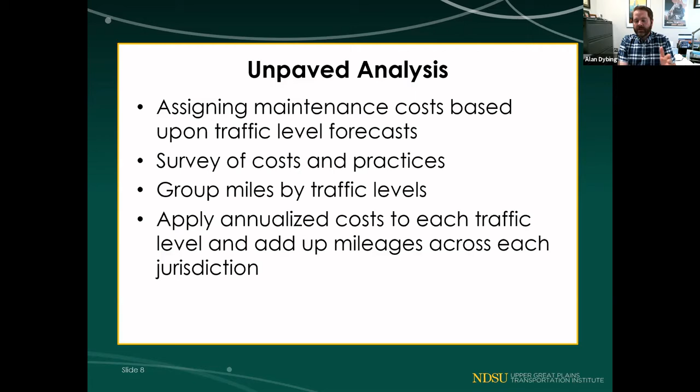In order to assign these maintenance costs, we send out a survey of costs and practices to counties and townships across the state. Then we group the miles of road in each county by traffic levels, and using their costs and practices, we apply an annualized cost to each traffic level and sum up the mileages across each jurisdiction. So for an individual county, we'll sum up the miles in each traffic category, apply an annualized cost, and then we have the total cost for that jurisdiction.

I mentioned the gravel survey. We mailed it to all 53 counties and to all the organized townships across the state. On the map on the right-hand side of the slide, the green represent the organized townships and the gray represent the unorganized townships. For the counties, we got every single survey back, so an excellent response rate. On the townships, an excellent response rate as well; 75% of the surveys came back. Again, they were based upon the costs and practices.

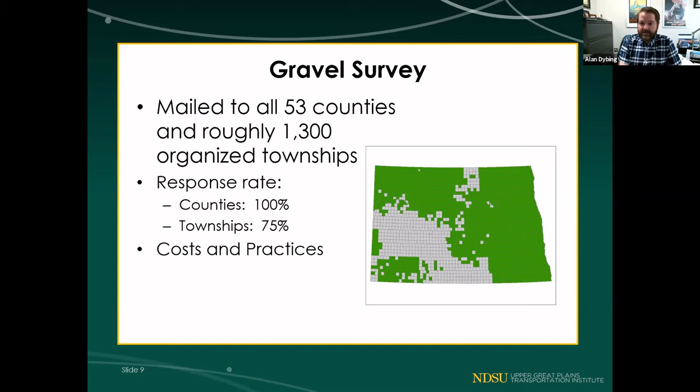One reason we apply different costs at different county levels is there's a lot of variation from county to county. One of the largest sources of variation is the availability of quality aggregate to put on the roads. This slide is the aggregate cost per cubic yard, mapped to show variations. One of the factors in how frequently they apply overlay to their gravel roads is how much the aggregate costs. We can see regional variations out in the oil patch: McKenzie, Williams, Divide are higher costs. Traill County on the eastern side is an outlier. Their reported bids for gravel include the cost per yard plus the trucking costs, so that is high.

One of the questions we always have when we have the results of the study is to look at variations from county to county and region to region. We may have one county out west with similar mileage to a county out east, and the cost may be much higher due to traffic, but also due to cost component reasons. So this is the cost per yard.

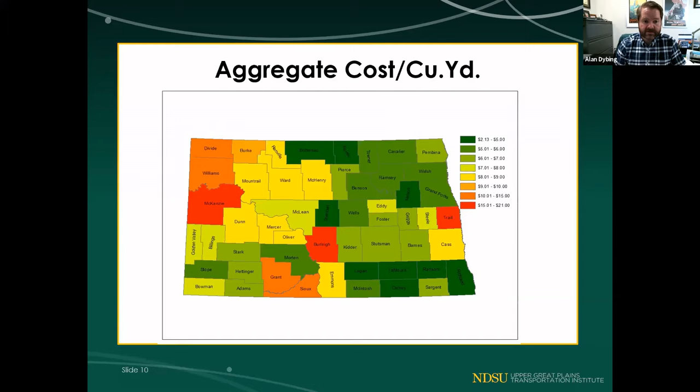Then the last set of questions regarding the gravel we asked involved specifying and testing of gravel. And both of those practices ensure that we're getting quality material. Washboarding, rutting, dust, and loose rock and sand are all gravel quality issues, and based upon the quality of gravel, they will affect safety risks and maintenance costs. And LTAP staff, we'll hear a little bit more from them this morning as well, talk a lot about this in their educational outreach to the counties and the locals.

And so on the right-hand side, we have the gravel specifications. The counties that replied that they do specify their gravel are in blue. And then on the lower right section of the slide are the counties that test their gravel. So it also ensures that they're getting quality material. So that wraps up the gravel section, and I'll hand it over at this point to Tim Horner to go through the paved analysis.

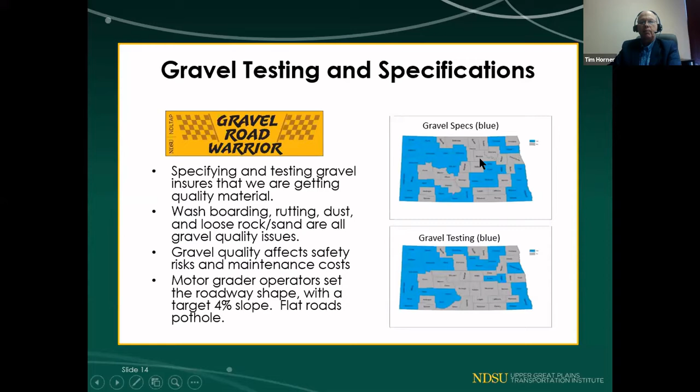We're on the paved analysis. So I do want to back up one screen. On the gravel testing, we got a comment, I think a week or so ago, that Ramsey County does spec theirs. So we didn't update that slide, but in case Ramsey County's listening, we were listening. So just so you catch wind of that.

Okay, so we're on the paved data analysis, and we got about 10-15 minutes to get through this, so I'll kind of move a little quickly. Everything has data collection, and everything starts with traffic. And I always point out that when I was a designer, whether it was bridges or pavement, the first thing we did was call the people and ask what the traffic estimates were, so you could design something. And this is really no different in pavement and bridges as it is in gravel.

So we have to do data collection then for the pavement material after we have the traffic, and that's on the pavement surface ride, and also on the thicknesses of the pavement. Pavement is like a wire. When you bend it, if you bend it too much, too often, it breaks. A stiffer, thicker wire will do a little longer, and so that's basically why you have to have the pavement thickness.

And then we ran it through an actual pavement analysis routine. Basically, it's just a reverse of the design. You design for 20 years, so you say how thick a pavement do you need to go 20 years, and if it has a certain condition, you back calculate how many years it has left, so you know when you have to do it. And I'll talk about that in a bit.

So data collection is kind of an interesting topic. We used to use the North Dakota DOT Pathway van, but they were in the process of replacing theirs at the time. So luckily the technology in smartphones has improved quite a bit. So there we had 3 smartphone applications for photo logging, and 3 for ride, so that we could average the ride scores. And then you could verify the overall pavement score with the visual to get a pavement score, a 0 to 5 score, which is typically what's used for design as well. 0 to 5, and 2.0 to 2.5 scores poor, and 5 is new. So those are smartphone applications.

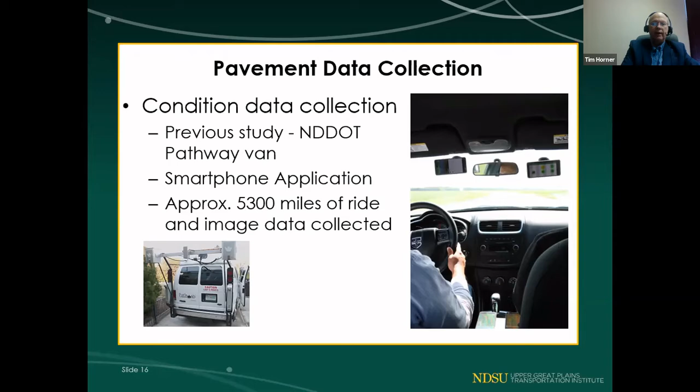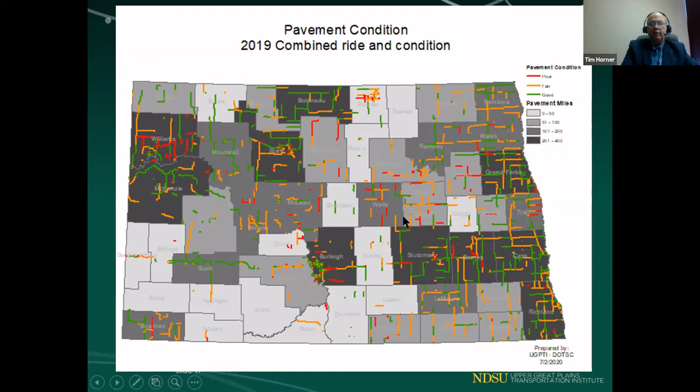They drove 5,300 miles of ride, and image data collection shows up on GRIT. And then based on the surveys, if you see red out here, those are kind of poor pavement, poor ride and distress. And then orange is marginal, fair, and then green is newer, good, maybe recently seal coated. And then GRIT, which most of you know, is the GIS-based roadway history and existing condition type file that we built several years ago through legislative direction.

What we're looking for, again, is the pavement thickness and type, the base thickness and type, the subgrade strength, and the pavement age. Again, that pavement thickness and the subgrade determine how well it can handle the traffic loads that Alan's traffic analysis puts on. We also need to know shoulder type, because we have to know if the road's wide enough to put an overlay on. If it's not, we have to add some costing for the widening, and dirt work is expensive, and it's a significant addition if it's necessary.

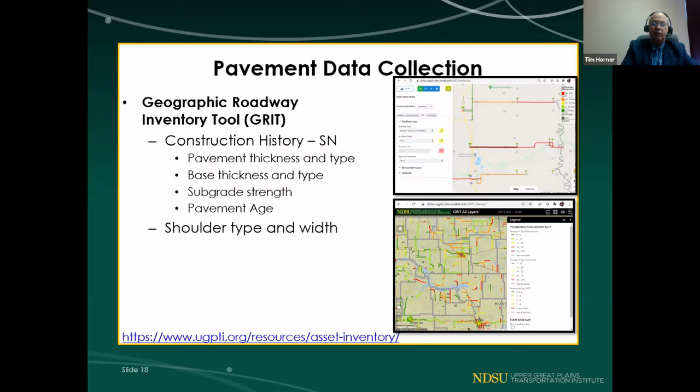So the design inputs, again, the PSR, the present serviceability rating, again, that was that 0 to 5 score I mentioned, and we give that pavement a 0 to 5 score, and then we know where it is within its life, take into account the cumulative ESALs, and then we also look at the structural number, which is the combined layer strength of the pavement and the gravel base thickness if it exists, and then that's the stiffness. And then subgrade strength is also a stiffness component.

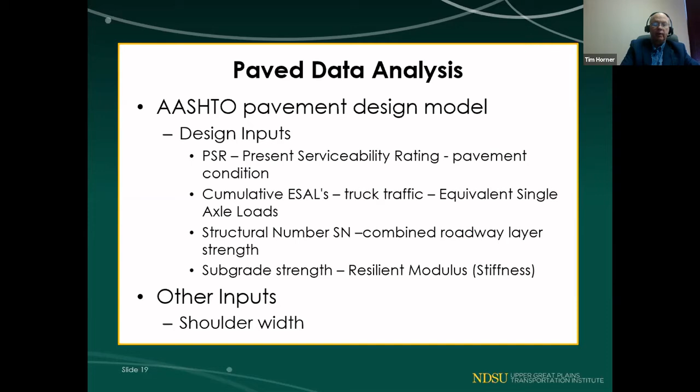And then we determine how well the existing pavement and the current condition it is, and how well it will handle the projected loads. And then we project what the remaining life is on that pavement, and basically what year it should have an overlay, or if it's due for reconstruction. Then the shoulder width is that input.

Then, just as Alan mentioned, equivalent single axle loads. So there are areas of the state that have significant single axle loads, and that's the red zones. That's where we have over 1 million projected equivalent single axle loads over a 20-year period, which is a fairly heavy truck loading factor for county roads. And you can see there in northwest North Dakota and the oil area, and then some around Dickinson, definitely on the eastern area of the state as well. The other areas are paved, but they probably don't have as significant of pavement loads, although there are some areas where they are.

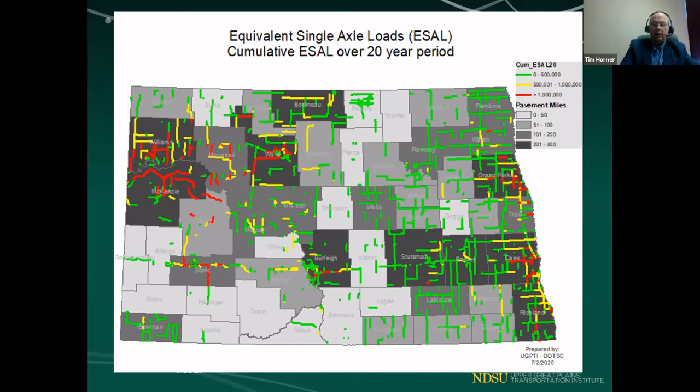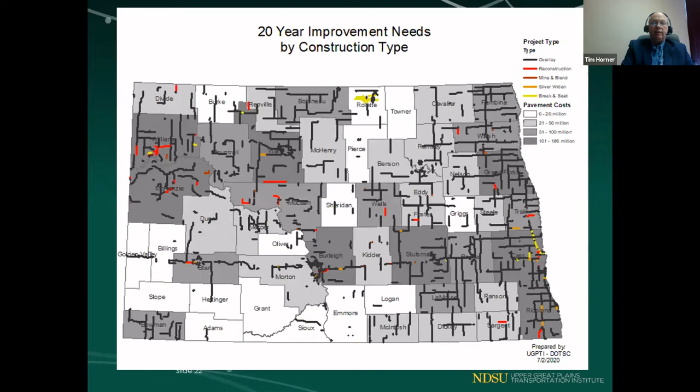And if you have to widen it, it's about 87,000 per foot of widening. And if we had to do a concrete pavement repair, and there are some concrete roads in the state, especially up in north central North Dakota, then that's about 450,000 per mile. So the 20-year projections that we came up with look like this. Black is the overlays, and red is reconstructions, and yellow is kind of an orange or a little bit of sliver widening and mill and blending and that type of thing. So all pavements in the state basically get some type of treatment in a 20-year period.

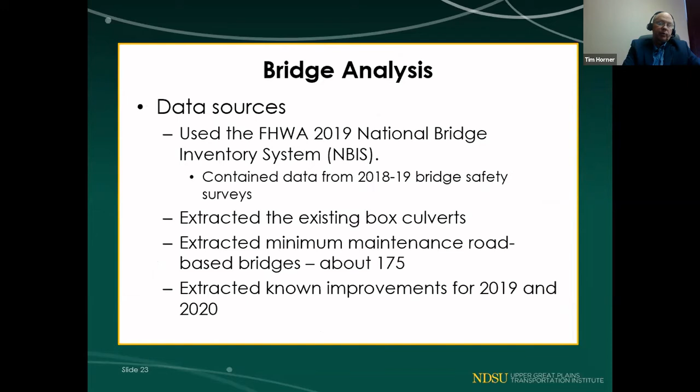Now the bridge analysis. Just to cover this, we use a 2019 bridge inventory. You have to survey the condition of bridges every 2 years. Those are bridges over 20 feet in length. We extract the existing box culverts unless we spot that one is in very poor condition. And then we extract minimum maintenance roads, and that's about 175 bridges. And then we extracted known improvements for 2019 and 20, so we wouldn't project that they were necessary if they were already just recently completed and happened after the 2018 and 19 surveys.

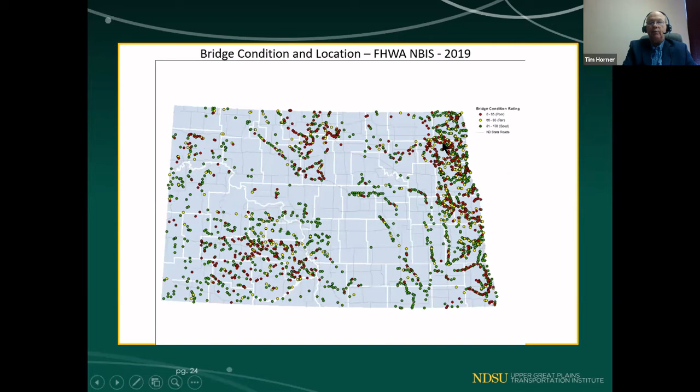Excuse me. And this is the condition of bridges across the state at the local level. Red is not good, of course, that's a poor condition. And then of course there's yellows that probably, we look at other factors to see if they may need replacement. And then the greens are generally pretty good bridges, but there's a lot of red and yellow out there.

In a nutshell, we're looking at the deck, the superstructure, the substructure scores. There's 0 to 9 scores. If they're 4 or less, that's an alert that it probably needs to have an improvement or replacement. We look at on-system bridges if they have less than an HS20 loading capability, or if they're structurally deficient. Widths of less than 20 feet off system, we would identify as needing improvement. And low sufficiency rating with an unknown foundation, although sufficiency rating is sort of disappearing from Federal Highway's arsenal on bridges.

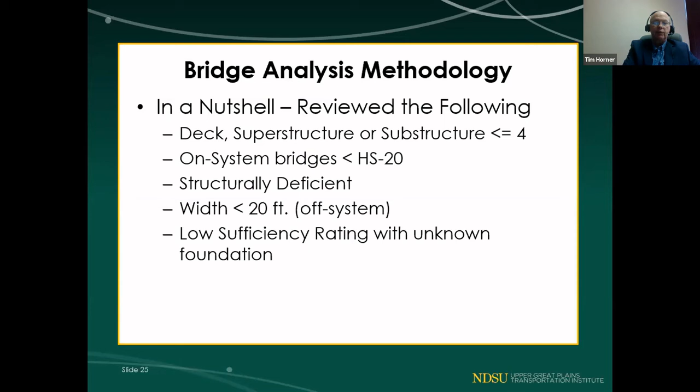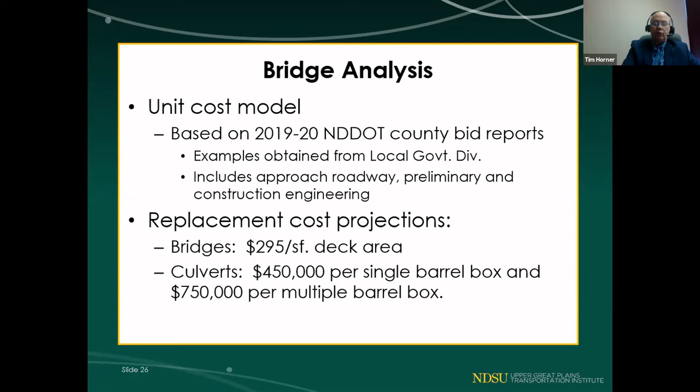But we did take a look at it for this study. Unit costs, we'll jump down to the bottom area. Basically, they've increased since the last study. We look at bridges, bridge replacements at about $295 per square foot, and that includes the approach road or overburden on a box culvert. Box culverts are $450,000 for a single barrel and $750,000 for a multiple, and that includes the roadway work that goes along with the bridges, approach roadway or roadway over the top of them.

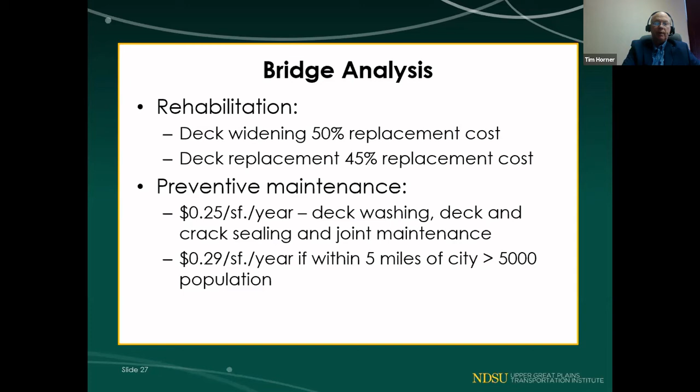Rehabs, we figured 50% of replacement costs. If it's deck replacement, just 45%. And then preventive maintenance is something that is evolving. Preventive maintenance is big in pavement. Bridges are getting to be an emphasis area for this as well. And we figured 25 cents per square foot for deck washing and crack sealing joint maintenance. And then it was a little higher if it was within 5 miles of a city over 5,000, where there might be salt dropping on the bridge.

This is the summary of what we have. So unpaved is always the big one, and we don't always think that gravel is the significant part of the cost, but it is. It's almost 2/3 of the cost of the total infrastructure for local roads. Unpaved is $6 billion over a 20-year period, 6.1. That's an increase of maybe 1%, which is the smallest increase we had since the last study.

Paved was $2.668 billion over the 20-year period. That was an increase of about 18%. So pavement costs have gone up. There's been more pavement created, and pavement unit prices are up. Bridges are $498 million for a 20-year period. And even though the number of bridges has reduced a little bit since 4 years ago, it still was an increase of about 11% because of the changes in unit prices for bridges. The cost of bridge replacement, box culvert replacement, those went up. I don't want to say significantly, but they went up enough so that this number changed 11%.

And then we have 9.3 billion for a 20-year period for the total, which compares to 8.8 billion from the period before. So overall, the needs increased 6% over our last study, which seemed logical to us, based on unit pricing. Unpaved gravel unit prices were a little more towards what they had been 4 years ago, or they dropped in some and went up in others.

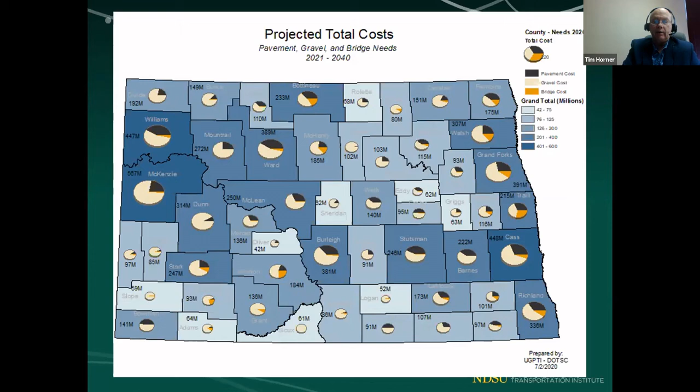And Brad Wentz handled the pavement, so he's the expert on that. Alan's the gravel and traffic, and Dale and I can bounce around on the bridge items or the overall report. This is the tougher part. Our comment period is ending October 12th. We gave 2.5 months to comment. The report was posted around July 21 when we made the presentation in July at a statewide webinar.